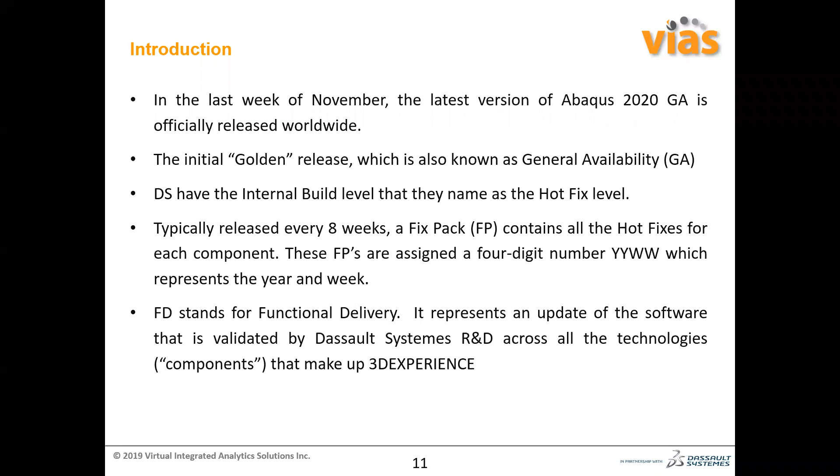So first I'll go with the Abaqus CAE updates. Whoever is using Abaqus CAE knows very well it is a big pain point when you want to do multiple sweeps or extrudes of edges through a particular direction or a particular edge. Previously, the edges needed to be connected together in a chain. But now this limitation is removed, so you need not have a closed chain of edges. You can just select any open chain of edges and select the extrude direction, and it will extrude the cell to create additional partitions.

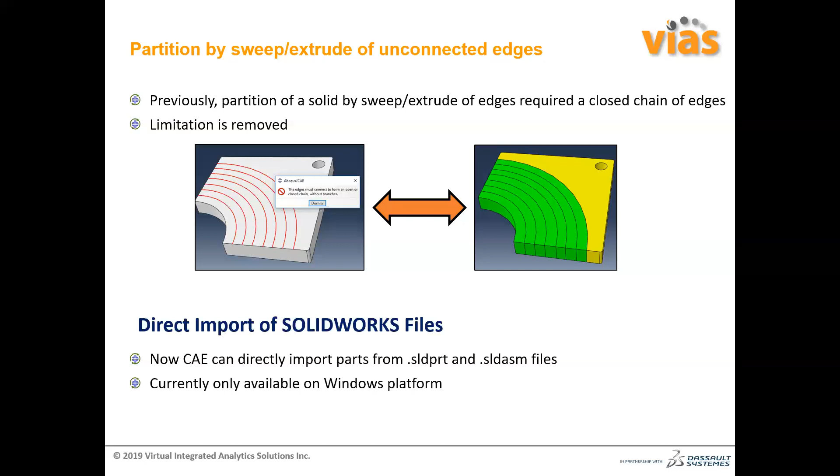And previously we used the SolidWorks Associative Interface. Now it's not required. If you have a SolidWorks file, you need not convert it to Parasolid or IGES format. You can directly import those files into Abaqus CAE without any associative interface, though that is involved in the background. But this is currently available on the Windows platform only, not Linux.

The third update is query using the local coordinate system. When you want to measure the distance between 2 points or nodes, or find the geometry face normal or element face normal, it always used to happen in the global coordinate system. Now we can select a local coordinate system as well, and based on that, the distances or other query output will be given in the message window.

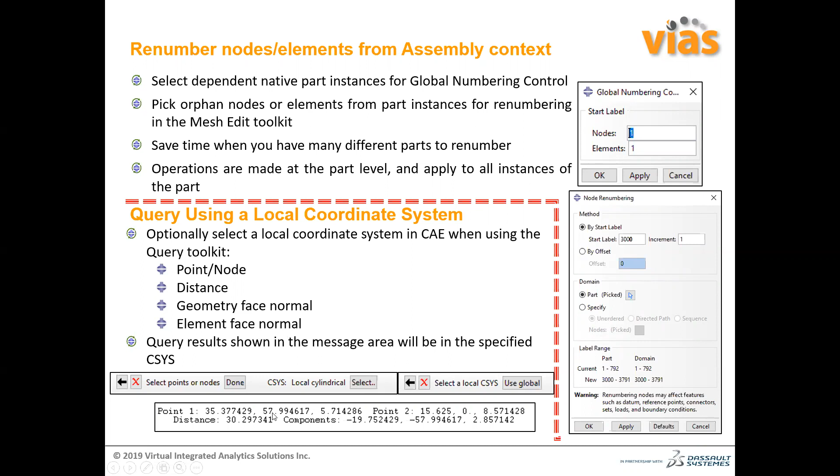So this is a big update. I know many people use Python regularly for Abaqus automation or scripting, and they always had issues with plotting. Now matplotlib is included in Abaqus 2020, so you can do a lot of plotting, especially in post-processing. Also SciPy and SymPy are upgraded, and the Python version is upgraded to 2.7.15. So it is still not in the 3.x version; it is still in the 2.x version only.

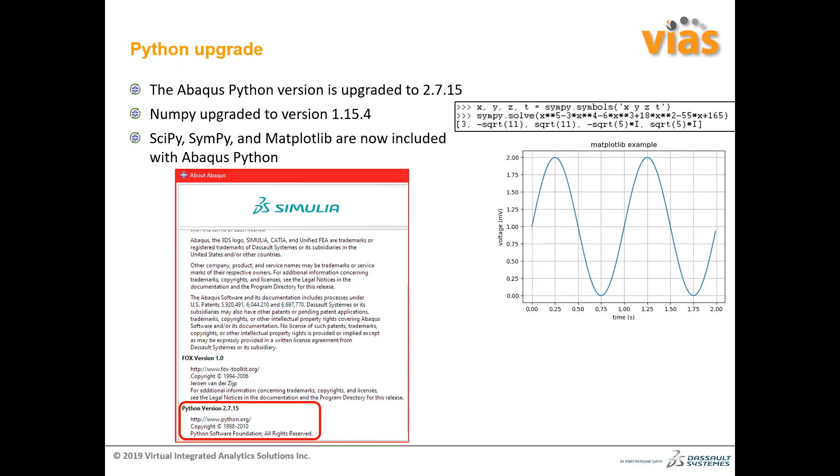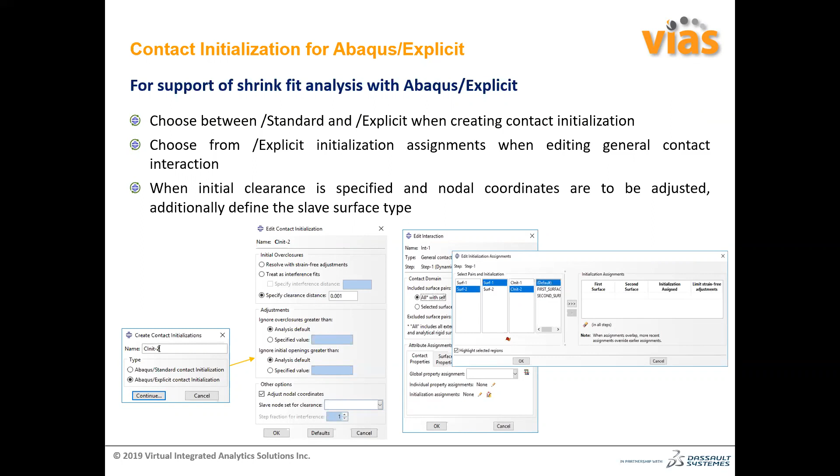So this is another advancement. When you used to do some kind of assembly operation, like a bolt or an interference fit, we did an import analysis: the contact interference analysis in Abaqus Standard, then we brought that result into Abaqus Explicit. But now the contact interference can be solved using the shrink fit analysis in Abaqus Explicit as well. This is supported both in the GUI and at the keyword level. So this is the example of what we are saying here.

Now you can launch the standard test from CAE for hyperfoam material behavior. So it's similar to what we used to do for the hyperelastic or viscoelastic material or the isotropic elastic material, but this is now supported for hyperfoam material as well. So that means you can do the calibration in the calibration tool of Abaqus CAE for hyperfoam material.

And this is one additional update, which is color code by geometric cells and faces. This is applicable both in the part and the assembly module. That means if you have multiple cells or faces and you want to identify them by color, you can do the color coding automatically in the Abaqus CAE window.

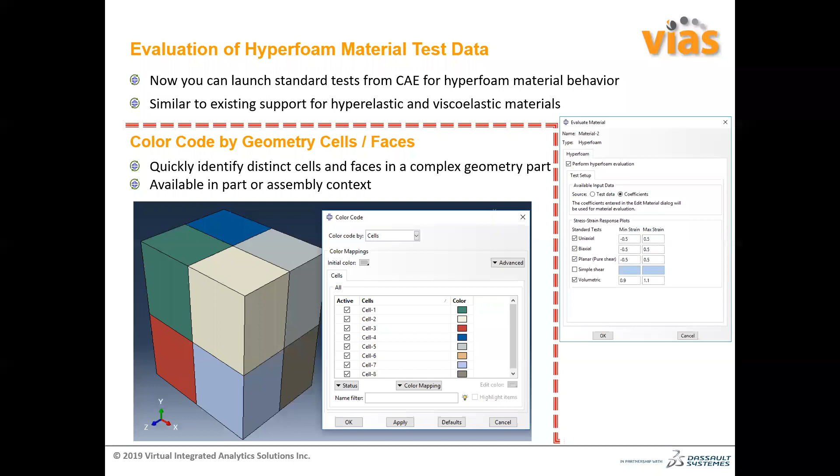Animation in the linked viewport manager. So when you have multiple viewports and you are trying to animate different plots or different kinds of deformation pattern, generally you are not able to do the animation in both at the same time. So the viewport manager allows that to be done. That means you can connect two animations together in multiple viewports, and they can be animated together in both viewports.

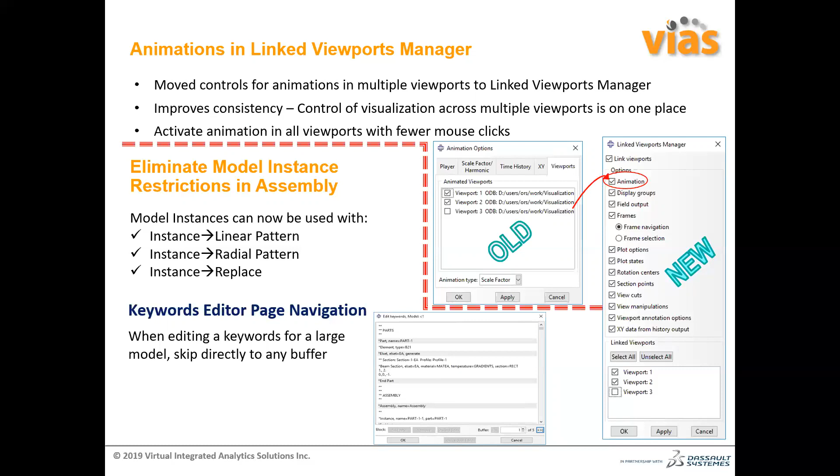And this is another update: eliminate model instance restriction in assembly. So model instance can now be used with a linear pattern or the radial pattern or the replace pattern. So this is the model instance, not the part instance. Part instance used to be supported previously, but now it is supported for the model instance as well.

This is one additional very useful update. So when you have two similar models with just a few differences in the geometry, sometimes you want to copy the constraints and a few of the interaction behaviors. In that case, you can directly copy the model object, basically the constraint, from one model to another.

And this is the handedness and the normal adjustment for bolt clearance. This is supported from the Abaqus 2017 version itself, but new support for the parameter for standard surface-to-surface contact is added in 2020.

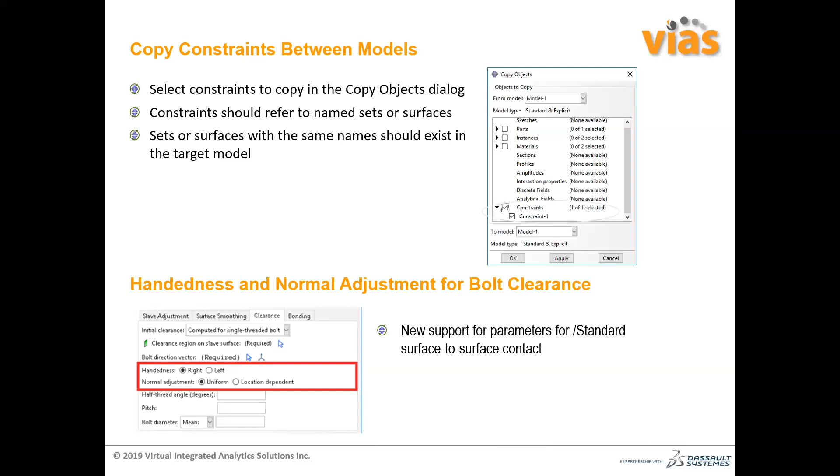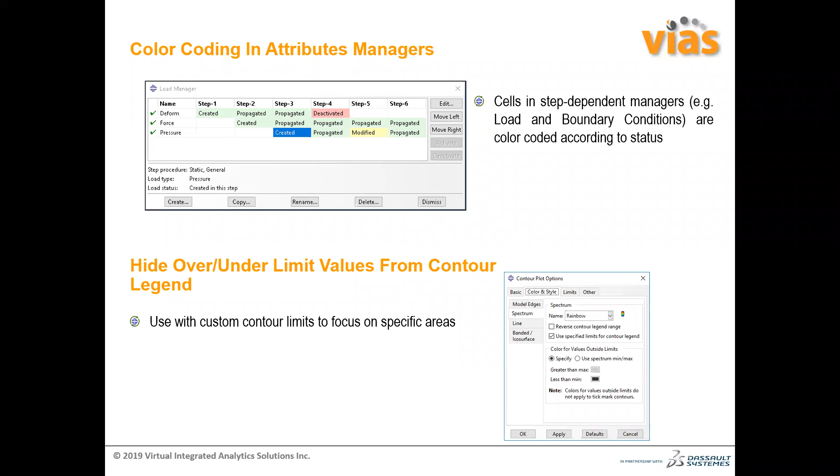And this is hide over or under limit values from contour legend. This is very simple: sometimes you want to create a legend where you don't want to show the over and under values, the maximum and the minimum value of the contour legend. So that we can do now.

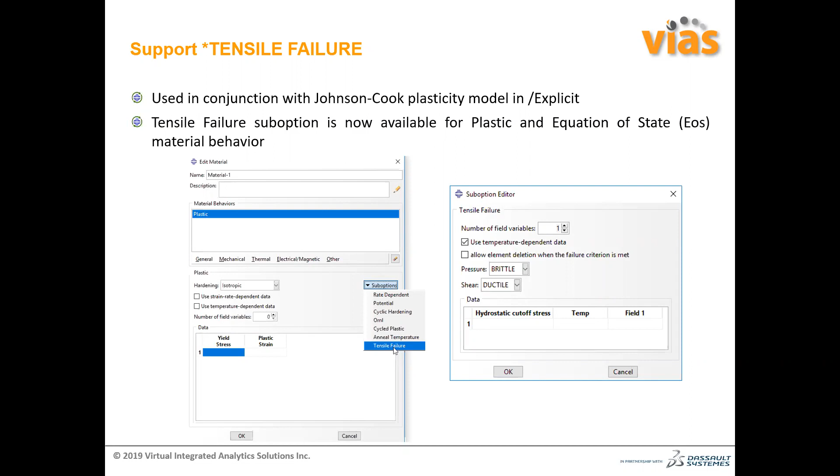So now I'll be going to the quick material and element enhancements. There is no new element introduced, but a few of the element or material behaviors have been updated and enhanced. One thing is the tensile failure for the material. You can use tensile failure for a particular kind of Johnson-Cook plasticity model. The tensile failure sub-option is now available for the equation of state material behavior as well in Abaqus CAE. This was previously available through the Abaqus keyword interface, but now it is available in the Abaqus CAE interface as well. So this is a good update, I'll say.

As you know, C3D8R or C3D8, the reduced integration or the full integration, are somewhat stiff or very soft. C3D8I shows very good behavior under different kinds of loading scenarios. C3D8I was not available in Abaqus Explicit analysis previously. Now it is included in Abaqus Explicit, so you can take advantage of this element.

Basically, it will not induce any kind of hourglassing issue, which you can see in the reduced integration element. And once again, this is not a full integration element, so it will not give you overly stiff behavior. In that sense, you'll get very good accuracy of the results when using the C3D8I element in Abaqus Explicit analysis.

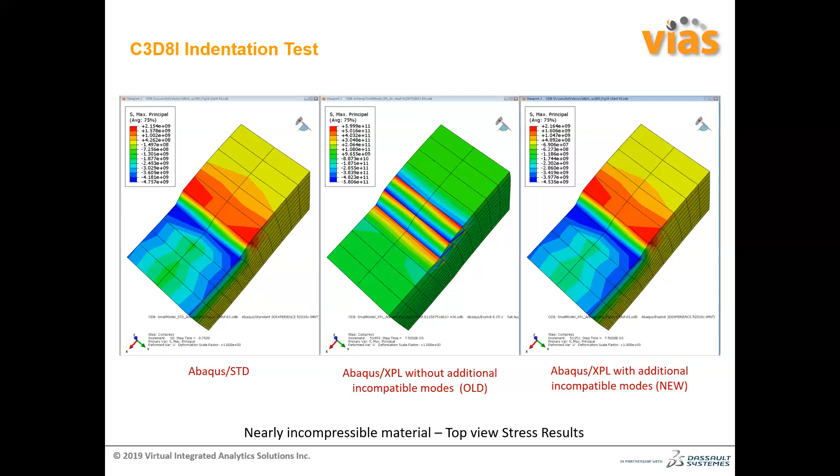A few of the elements which are added include coupled temperature-displacement cohesive elements. These can be used for fully coupled thermal procedures. So if you're having a structural-thermal problem and you want to use some kind of adhesive material which has both thermal and structural behavior coupled together, you can use these.

Element type DC3D5, a 5-node linear pyramid element, is now available in Abaqus Standard, which was not previously available. And the shear panel SHEAR4 element is available now in Abaqus Standard, which is useful for composite material.

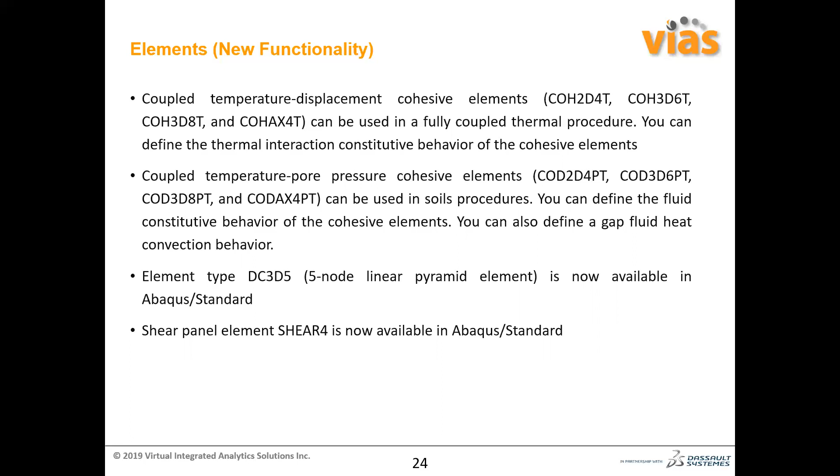So these are a few of the updates in the contact enhancement. We've given the updates in tabular format, but I'm going to discuss only those updates which are basically new functionality in Abaqus 2020, which was not even available in the 2019 FD release.

This is the interference fit capability in Abaqus Explicit, which I've already discussed previously. This is already included in Abaqus 2020 through CAE. And contact initialization using Abaqus Explicit - these are the two most important contact enhancements.

Apart from that, there are a few enhancements like the new bonded contact status output, and the enhancement to cohesive contact behavior with stiff, permanent bonds. These are a few additional updates which probably many users use.

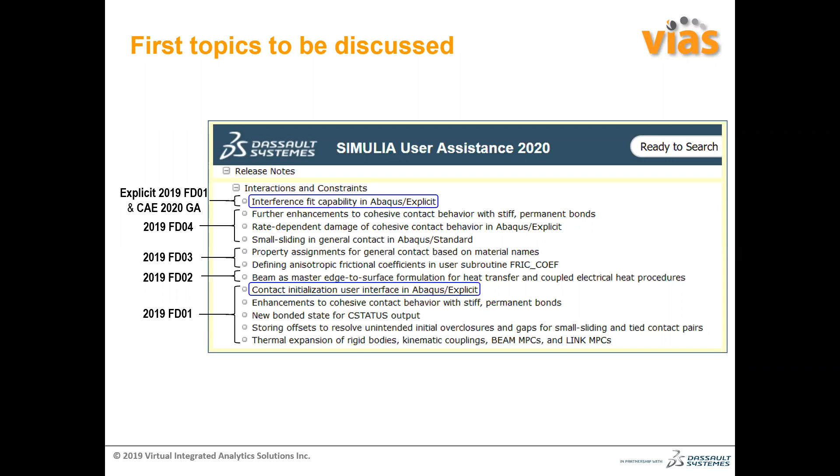I'll give you a quick overview of how the results look when using these facilities. This is one example where we're trying to compare the Abaqus Explicit and Abaqus Standard results for the same interference fit. You can see they pretty much match together.

That means if you're having a lot of assembly loads where you want to apply the interference fit in the first step of Abaqus Explicit, you don't need to do the import analysis again. You can do the whole analysis in Abaqus Explicit itself.

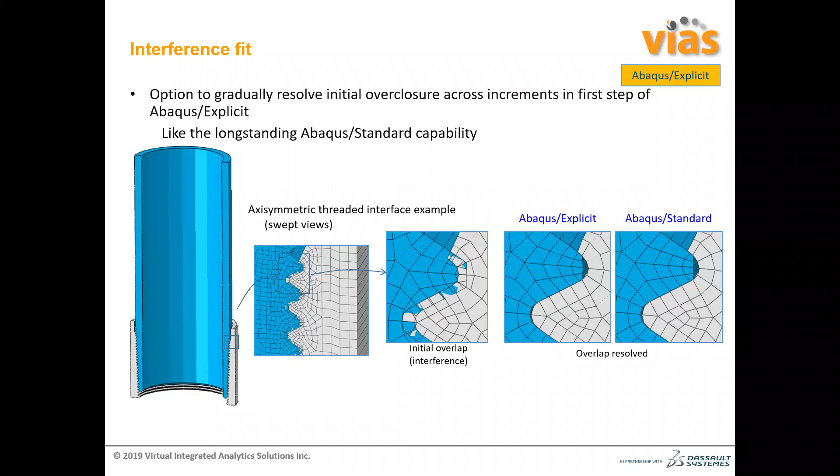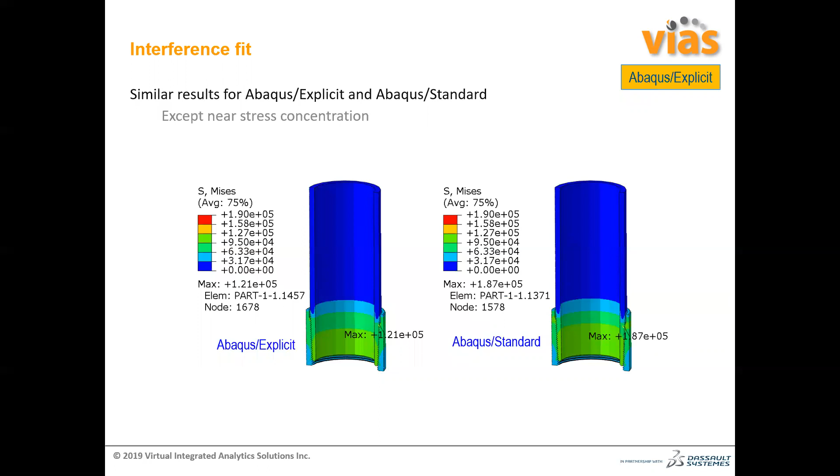The keyword previously was applicable only in Abaqus Standard for contact initialization or contact initialization assignment. Now this is also relevant to Abaqus Explicit, meaning we can directly define the contact clearance in Abaqus Explicit, and this is how the keyword looks like.

The people who are using the keyword interface in Abaqus already know these things, but what I'm trying to say is that we can include these particular additional updates in Abaqus Explicit analysis as well.

Specifying an interference fit distance here that differs from the initial configuration: the initial overclosure distance of the part is 1.25. So you specify the contact initialization name, the particular interference name, and the interference value, and we'll be searching below 1.3.

Abaqus basically tries to adjust that particular value, 0.4, and apart from that whatever value is there, that will be removed as overclosure. So 0.4 is basically the interference. The additional value is done as a strain-free adjustment - the node will be adjusted without adding any additional stress to the part.

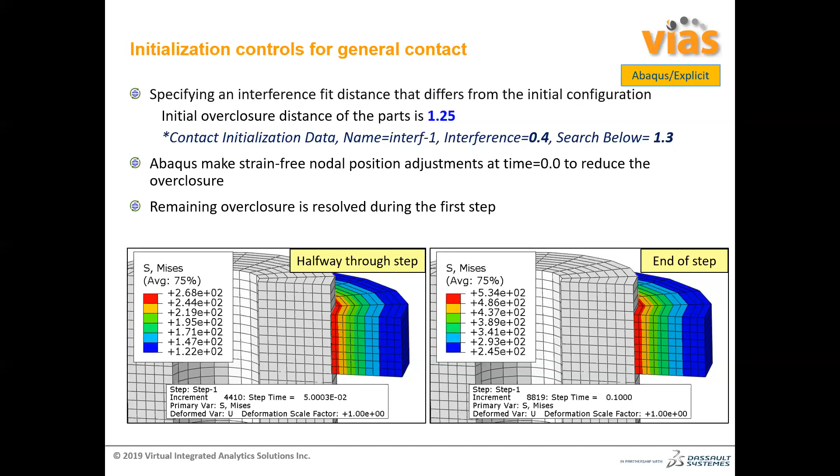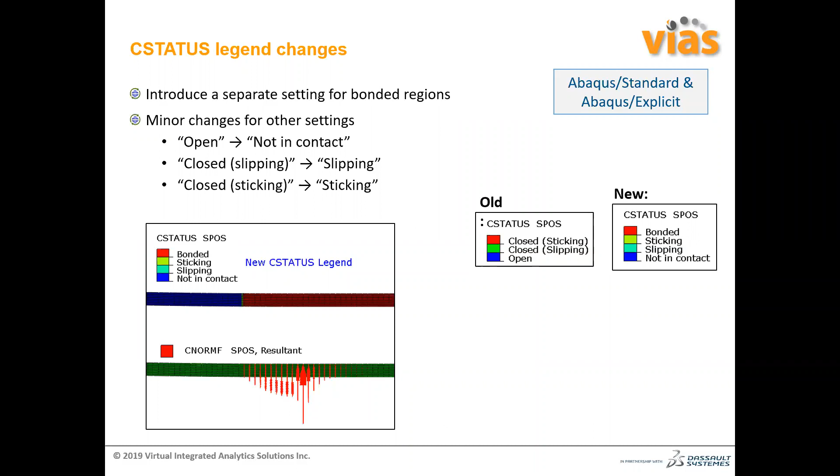This is one very good update - the contour of the contact status. Previously it was either closed or open. Now it is closed, open, and also bonded - sticking, slipping, open and bonded. All four different statuses of the contacting areas can be directly identified by seeing the contour. This is applicable in both Abaqus Standard and Abaqus Explicit.

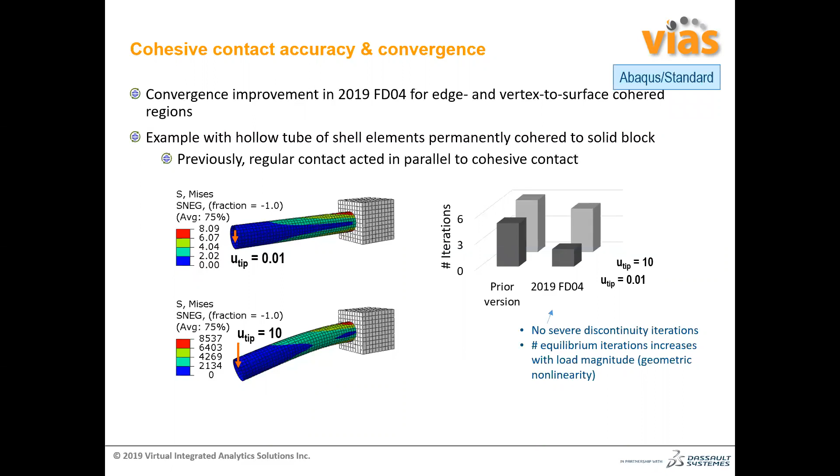This is a convergence improvement of vertex-to-surface contact for the cohesive zone. Here's an example. There's no severe discontinuity iteration happening, and equilibrium iteration increases with load magnitude, but you can see that the performance has increased quite a lot from the older version of Abaqus.

This is one thing which I'm always eager to see, but it sometimes makes sense and sometimes doesn't: adding the thermal expansion in the rigid body. So if you're having a rigid body and you want to include the expansion because of temperature change in the rigid body, you can include that one as well right now.

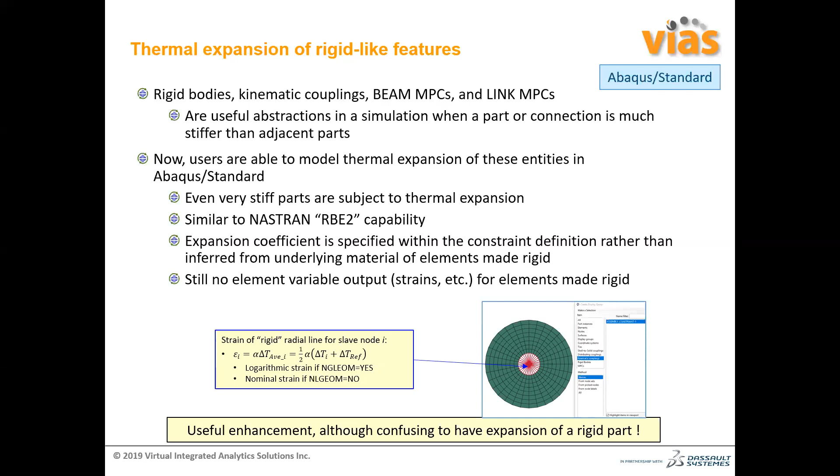So this is linear dynamic updates. I have not included many of the updates in this linear dynamics. As you know, modern finite element technology includes a lot of diverse element libraries and advanced material models and sophisticated constraint capabilities for modeling linear dynamics problems, especially direct matrix input and substructures. These are two areas where Abaqus 2020 has done a lot of updates and upgrades.

It now has rich material level and system level damping capabilities that I'm going to discuss in the next slide. And you get a lot of various output options, including specific linear analysis features like acoustic contribution factor for coupled structural acoustic analysis, energy flow for frequency response, or RMS Mises stress in random response analysis. These outputs were not previously available; they were incorporated in Abaqus 2019 FD version, but now they are available in 2020 GA version as well.

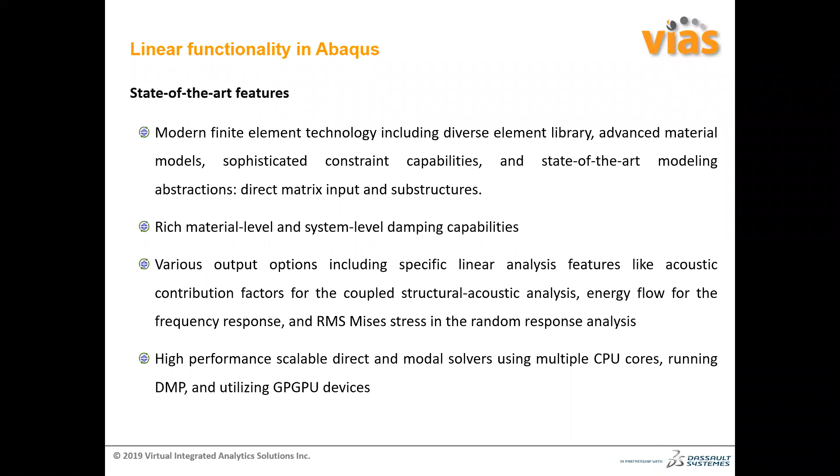Also, there is a huge performance gain in the combination of multiple CPU cores, or the hybrid solving scenario. So now we can define the damping capability in the frequency domain analysis. Previously it was at the material level and element level that you used to apply it; now we can apply it at the sub-assembly level and the system level.

The C and S value are the two different kinds of damping included in Abaqus 2020. The C basically includes the FE damping of the FE model, the global, and the C modal. The C global is basically material damping and stiffness damping, alpha and beta, and the C modal is basically M times D times M transpose, which is a diagonal matrix.

So this is basically defining the damping based on the modal frequency and the mode participation factor. And the structural damping once again consists of FE damping, global damping, and modal damping, where you can define the global damping to be a value like gamma global into K, which is dependent on the K value. And the S modal is once again M times G times M transpose, where G is a diagonal matrix -- basically a system level damping definition.

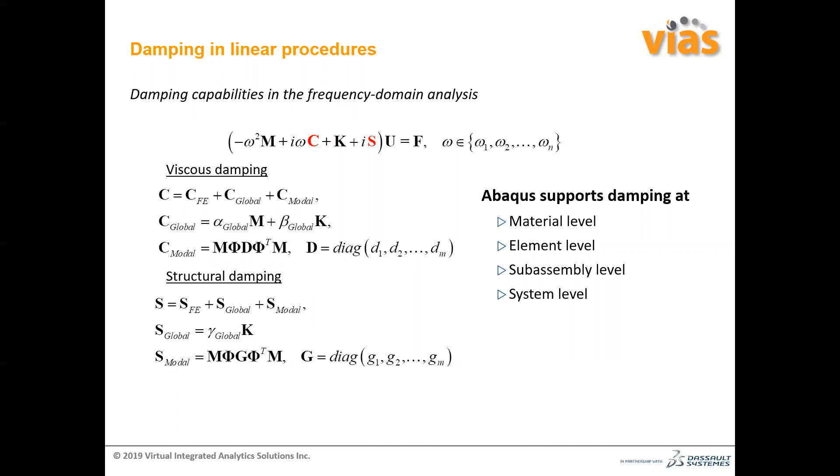In that sense, you can see when you are applying a certain kind of load what kind of energy gain is happening in the system. You can do the history and printed output of the integrated energy value of the whole model or its part -- a very useful scenario for modal analysis. Many people ask for the energy output at the part level, which is quite useful, as the integrated energy value at the part level.

If you know that for a particular part you are doing an eigenvalue analysis and see that one particular eigenvalue has a huge effect on the response of the system, in that case you can find for that particular mode which is the position where you should do some kind of strain gauging to see that location having the maximum amount of strain induced in the model. This particular output will give you that kind of indication.

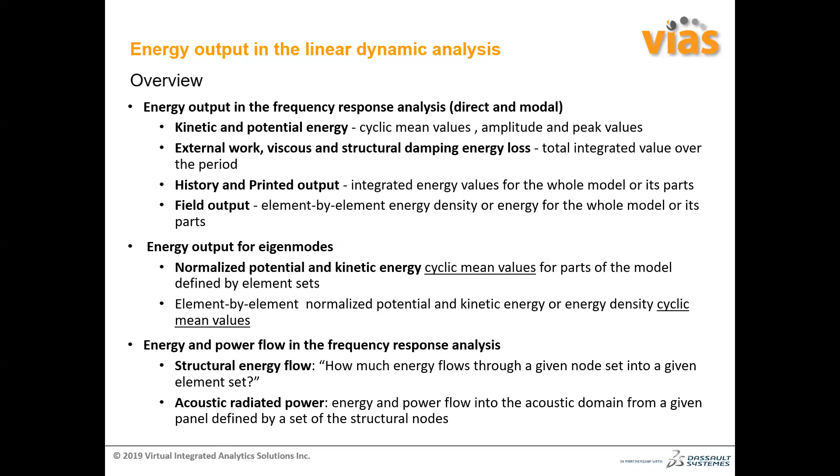And acoustic radiated power - energy and power flow into the acoustic domain from a given panel defined by a set of structural nodes. So if you're having a coupled structural acoustic analysis, and you want to see what is the power coming to a particular panel because of the acoustic coupling, that particular energy output will give you that indication.

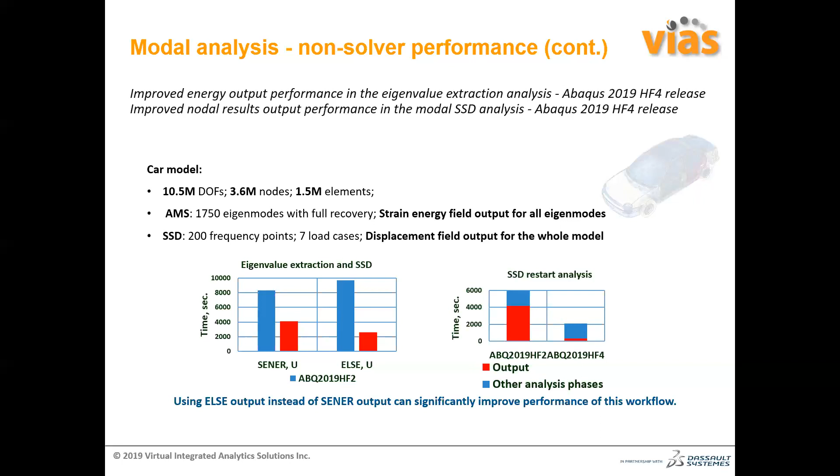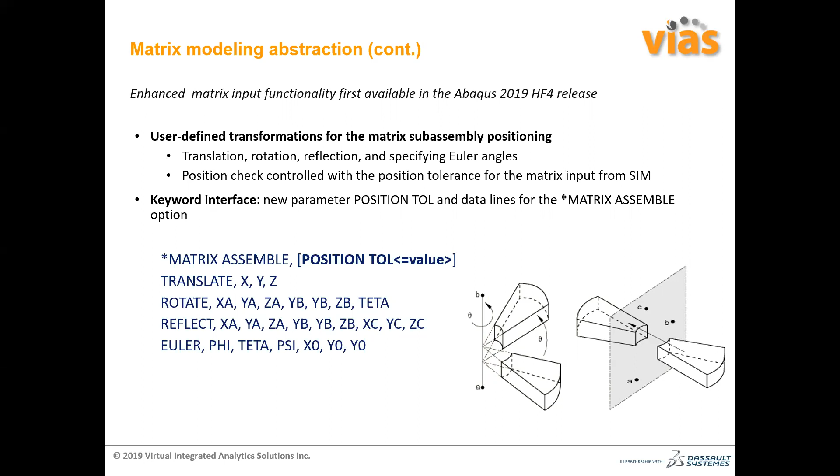But right now these matrices can be directly rotated or transformed into different kinds of orientations or positions. This is a very important output where you'll use the star matrix assemble option to define the translation, rotation, reflection, or Euler angle value for the particular matrix. This is an enhanced functionality available in the Abaqus 2019 hotfix 4 version itself, and it's anyway available in the 2020 GA version as well.

So when you're having some kind of DMIG matrix data in the bulk data format, if you want to translate that from Nastran to Abaqus, that can be done directly, and even the vice versa is possible - you can translate from Abaqus to Nastran translator as well.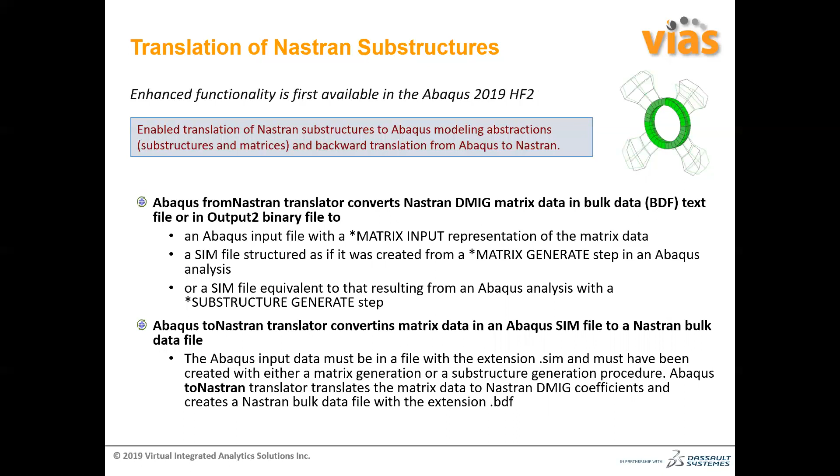And now we'll go to the updates in Abaqus Explicit. There are basically three main updates which we'll discuss in this webinar. I think these are the outputs where many people faced a lot of problems in the previous version of Abaqus. One thing is the distortion and DT-based element deletion, and second is linear kinematic conversion for the continuum elements. I'll give you a few tips and tricks on how you can resolve this kind of problem and gain a huge performance improvement in solving a particular class of problem in Abaqus explicit analysis.

And definitely what is the improved C3D8I kinematics, which I've already discussed previously - I'll just go through these things very quickly.

So if you know, when a material undergoes extremely large deformation, the element will become distorted so that the volume of the elements becomes negative, and this may occur without the material reaching a failure criteria. In that case, your Abaqus will either get a fatal error or it will be directly aborted. So what it does is write an element set which is like WarnElemDistortionDeletion set.

By going through the aborted ODB file, you'll be able to see where exactly the element distortion happened, but you really can't do anything on top of that. So either you have to add some kind of artificial stiffness to the element, or you have to use element deletion so that the element gets deleted and the analysis continues.

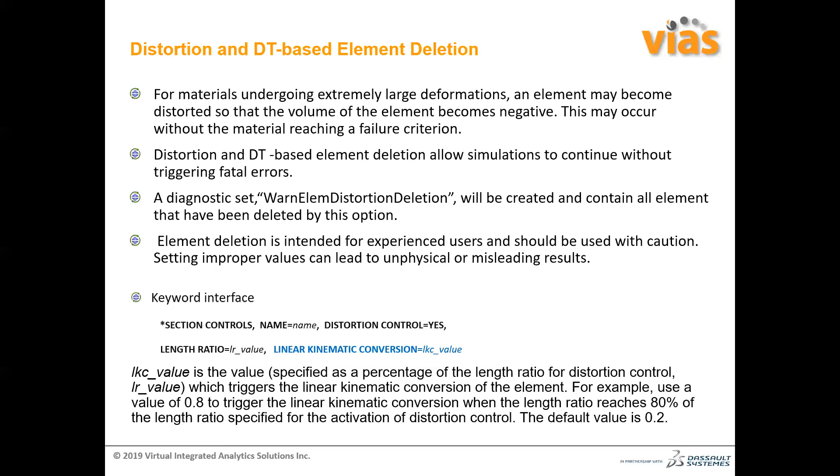Additional incompatible modes were implemented in Abaqus Explicit to make the formulation consistent with Abaqus Standard. That means if you are using some kind of C3D8I element in Abaqus Standard and want to import the part into Abaqus Explicit, that can now be done.

And for improved accuracy of results, if you have a lesser number of elements along the thickness direction, to reduce the hourglassing issue, you can use these particular C3D8I elements.

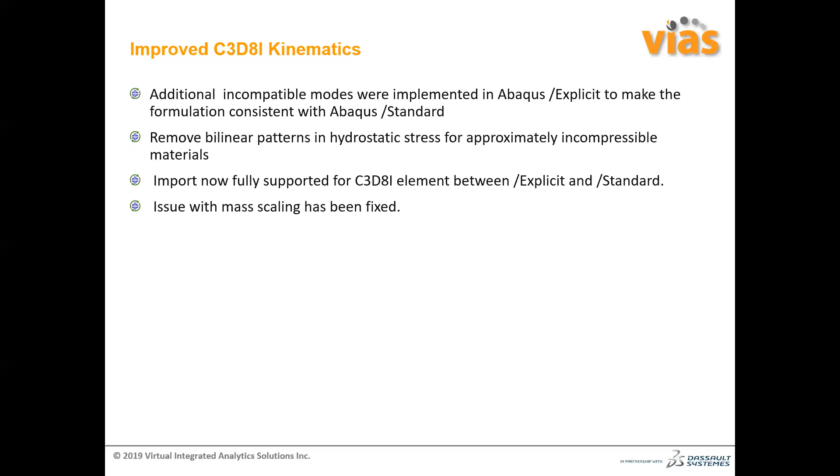It also removes the bilinear pattern in hydrostatic stress for approximately incompressible materials, and the import is now fully supported for C3D8I between both Explicit and Standard, which I've discussed. There was also an issue with mass scaling, which has been fixed for these improved C3D8I elements.

This is one scenario where people mainly using the Coupled Eulerian-Lagrangian option for solving a high pressure gradient fluid flow, high flow rates, sharp corners on structural mesh or large motion of structural mesh, or in the case of blast analysis.

What happens in those cases is that if you have a sharp corner or high pressure gradient, you'll see that some of the liquid or the Eulerian domain starts to leak. Previously what we used to do is some kind of addition in the environment variable to change the default behavior of the leaking, to remove the leaking of the fluid portion.

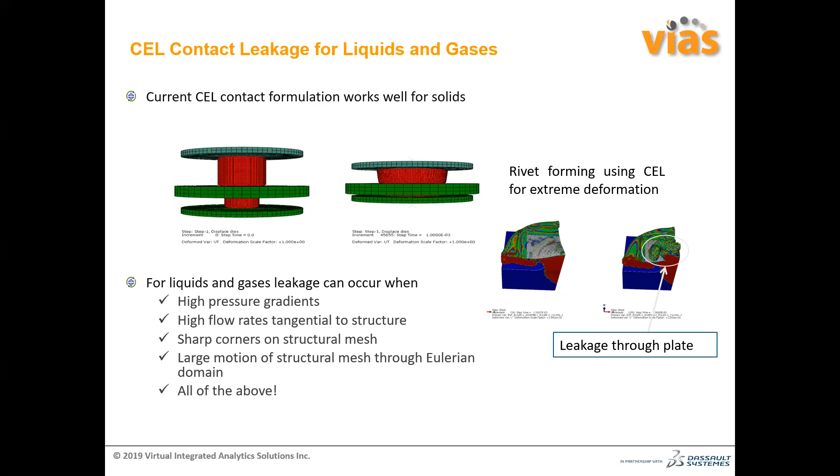But right now, with the additional enhancement in the CEL contact formulation, this particular leaking of the liquid or gas will not happen.

This can be used for both solid and shell structural surfaces, and the structure should be thick enough to avoid multiple surfaces intersecting the Eulerian elements. Leakage may still occur where a single Eulerian element is intersected by multiple surfaces. This is one scenario where you need to be very careful.

Shell surfaces must have different materials on the opposing sides, and the enhanced formulation is more expensive than the default formulation in both CPU time and memory use. The keyword interface is basically star adaptive mesh refinement, then element set, and you say enhanced contact equal to yes. But remember, this option is not required unless you are having a fluid leaking issue.

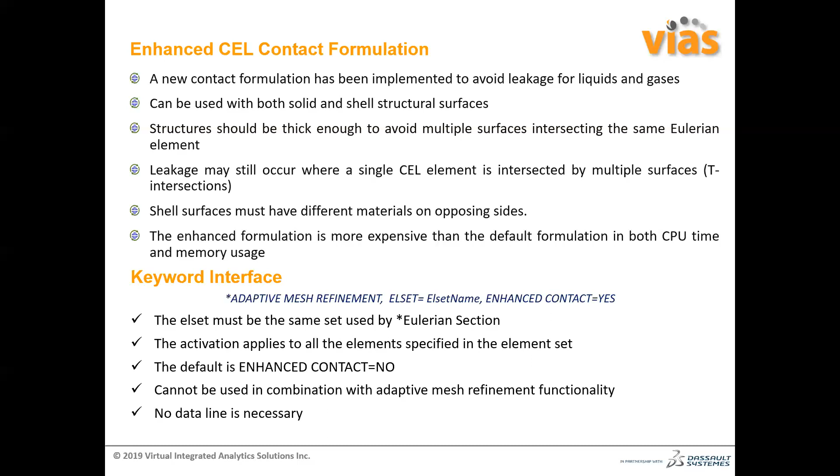So to show a few of the issues here, you can see the previous version of Abaqus and the new version of Abaqus.

So after a certain time, you'll be seeing the tank is fully void due to the leakage issue. So this issue is now solved in Abaqus 2020 with the enhanced contact method. So you can take advantage of this one, and even in the blast analysis you can by default switch on this particular option to get a better kind of CEL behavior.

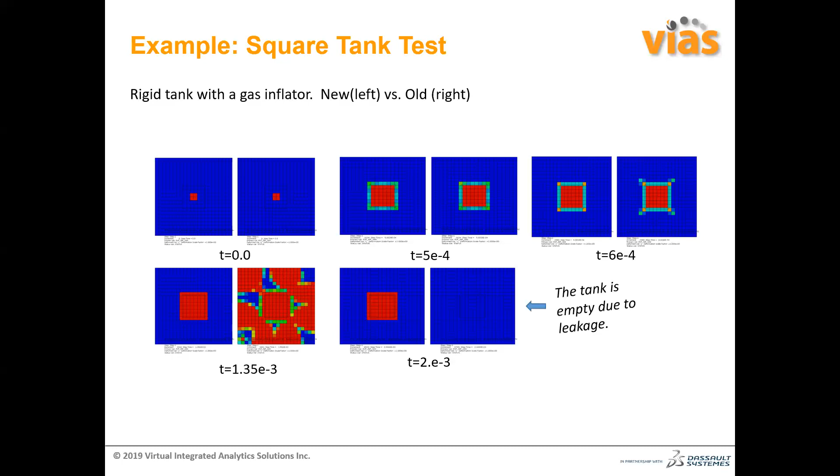And this is one very important update, and many people really don't understand this point: when you have multiple kinds of constraints defined, it could be rigid constraints or some kind of kinematic coupling, or some kind of tie constraint, if a particular node is shared by different kinds of constraints, they try to resolve by themselves so that there is no over-constraint. But in explicit analysis, for resolving this tie constraint or multiple constraints, you basically use the

implicit solution method, where Explicit creates a stiffness matrix that is solved using Newton's method, and it causes a significant performance penalty depending on the size of the matrix, and the memory requirements also increase, and it degrades the load balancing and negatively affects the parallel performance. So if you're solving on multiple CPUs, you'll see a huge slowness in the solution for this kind of model where you have many constraints defined.

These situations occur mostly when boundary condition and dependent nodes overlap constraints like tie, coupling, MPCs or connector elements, or when using nodes of a rigid body as dependent nodes. So the resolution is that you need to go to the ODB and search for *CONSTR*. Once you do that, you'll get the set names. You should check which names have a value like _ELEM and _ELIM.

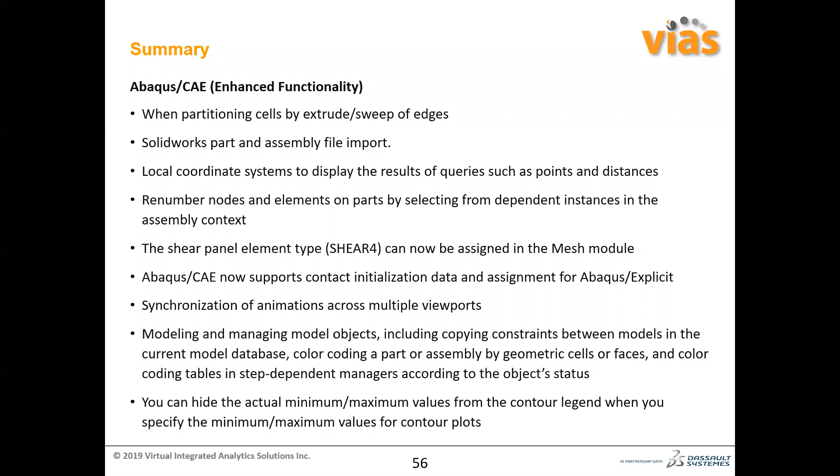And when you are modeling or managing the model objects, basically you can copy different kinds of objects like constraints between the models from the current model database. You can do the color coding of part and assembly by geometric cells or faces. Even you can use the color coding tables in step dependent manager according to the object status. You can hide the actual minimum and maximum values from the contour legend when you specify minimum and maximum value for the contour plot.

So these are the enhancement summary in the analysis phase. So there is substantial computational performance gain achieved for linear dynamics procedure. You can now do the translate, rotate, and reflect transformation to define the position of the matrix subassembly. Several enhancements to the steady state transport analysis are included here, though I haven't mentioned them in the presentation, but I have included them in the summary phase.

So basically, people who are working in the tire domain know that the steady state transport analysis is required to rotate the material through the mesh. So in that case, when you're having different kinds of unit systems, or even the performance was somewhat objectionable in previous versions. So right now this functionality has several enhancements, so that means you'll be seeing a huge performance gain in the solution time as well.

So Abaqus provides the capability to transfer the model data and results of element sets or part instances multiple times from Abaqus Explicit to Abaqus Standard. The default iterative solver controls are now changed to improve the solution accuracy and nonlinear convergence pattern. And new energy variables are available in the steady state dynamic analysis and in the eigenfrequency analysis.

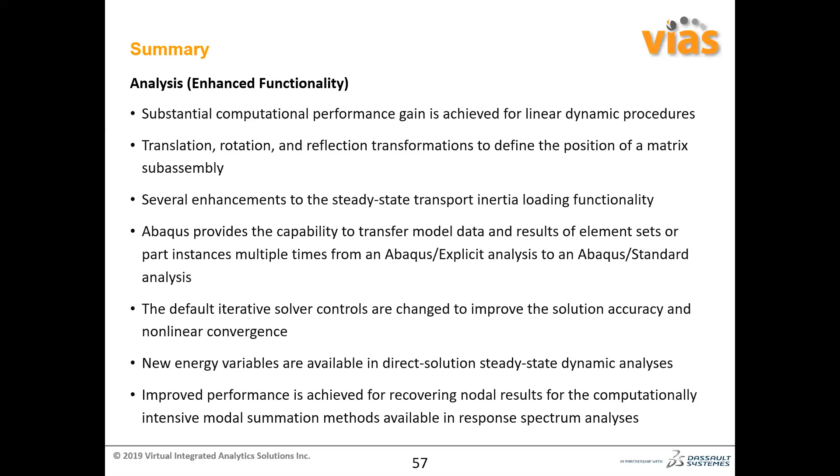Improved performance is achieved for recovering the nodal results for the computationally intensive modal summation methods available in the response spectrum analysis. So these are some of the enhancements in the elements, like distortion based element deletion, the shell element deletion based on the integration points that are now available in Abaqus Explicit. Symmetric modeling using cohesive elements is now available in Abaqus Standard. So the thermal expansion of rigid bodies like kinematic coupling, beam, MPC or link MPC can be incorporated.

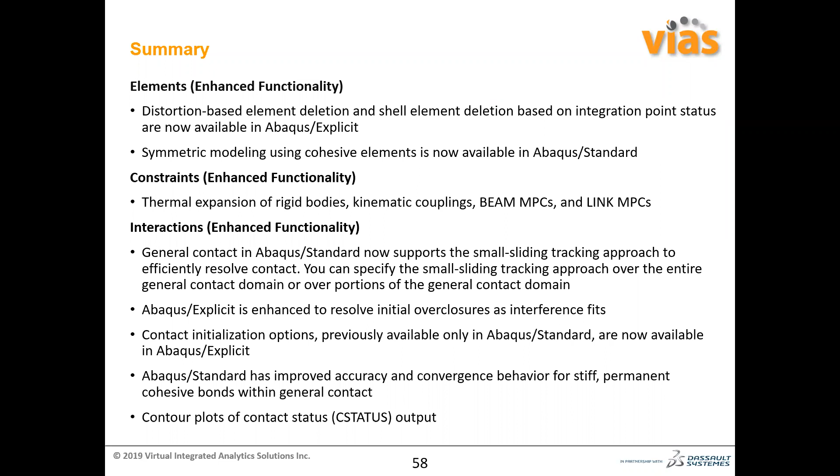In the interaction, you can have the small sliding tracking approach for the general contact, which was not previously available. Abaqus Explicit is enhanced to resolve the initial overclosure as interference fit. Contact initialization is applied once again in Abaqus Explicit, and Abaqus Standard has improved accuracy and convergence behavior for the stiff, permanent cohesive bonds with general contact option. And in the contact status output, you can see an additional plot of the bonded status as well.

So the output is mostly on the energy side. So in the steady state transport analysis, you can request a few additional outputs like SST-IF or SST-IRF, SST-IRM. So these are the different kinds of output which you can get from Abaqus in the steady state transport analysis. And if you are using user subroutines, the table collection functionality was previously available only in Abaqus Standard, but it is now available in Abaqus Explicit as well.